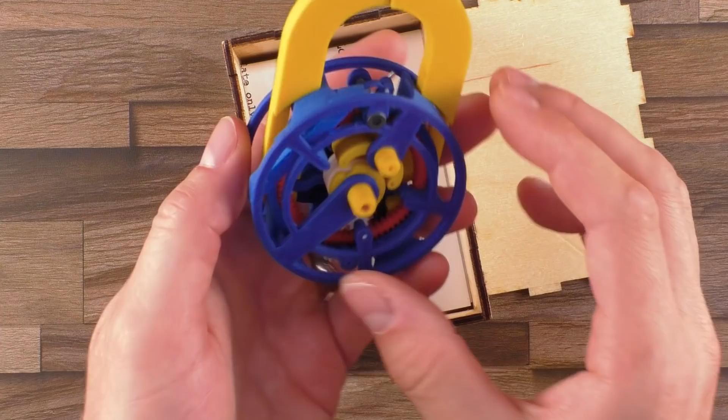And if you look inside, there is where the magic happens. This is the so-called Bovalis Lock number 1, designed and manufactured by Constantin Bovalis, mostly of 3D printed parts, and it comes also with an instruction here inside. It describes some rules to handle the puzzle, so it's important that we follow them, I guess.

And the rules are: you may directly manipulate the yellow, so that means the yellow parts probably. Then you may remove the clear, or maybe this one here. But the clear can directly manipulate only the red. Okay, so I'm not allowed to touch the red, but can touch it with the clear. But the clear is still in here. Now let's see. Your goal is to remove the coin. Okay. No force or extraordinary force to be applied to not damage anything.

Okay. As I mentioned, this is made all from 3D printed parts, as you can see. It looks like these gears here inside, let's say all the parts that are white, are made from SLS printing, while the bluish ones and the yellow ones seem to be made from FDM. The more resistant parts are the SLS for sure, it's probably nylon. And I think it's a good idea to make the gear parts from nylon, since they are loaded with some force and need to be more precise than the other parts.

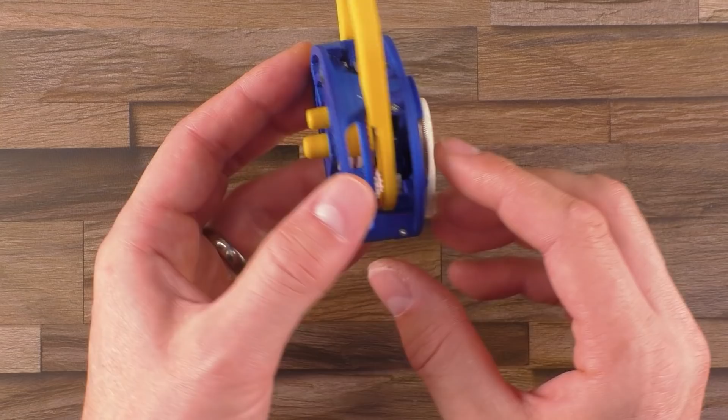What's also fascinating on this puzzle is that you can see everything here right from the beginning. So let's say the solution is hidden in plain sight. Actually, I do not expect this one will be too difficult, since we can see everything. Therefore, I will try to explain how I expect the thing will work.

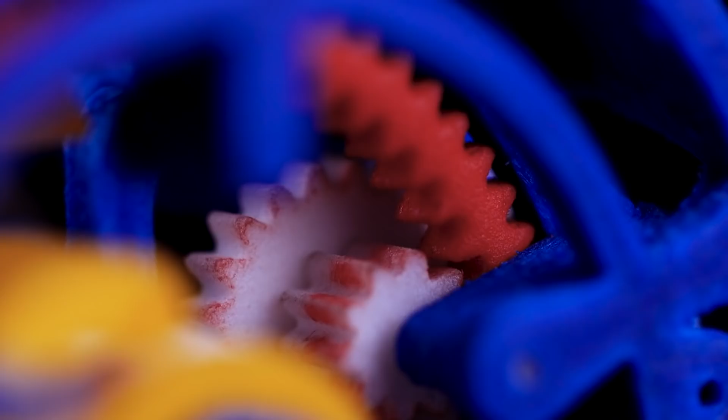Now let's have a closer look. We have these yellow pieces here, which we are allowed to touch, but are not really able to move right now. And we can see that this piece of the lock, which is obviously the one that opens, you can see it up here because of this shape. It seems to be locked inside here.

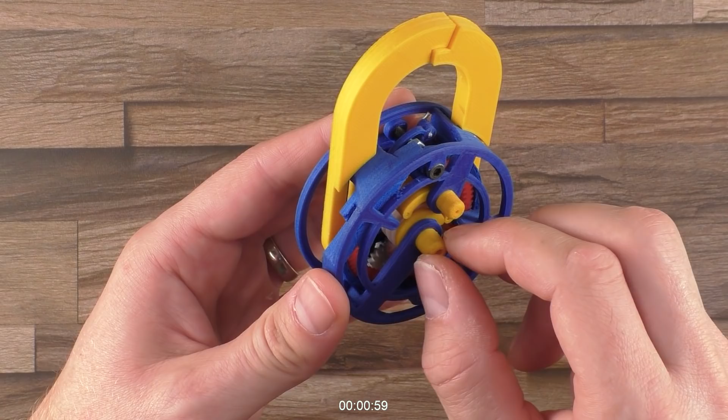You can see inside here. It's locked by this little lever over here. But the other lock is not blocked by this lever. It's blocked up here by the left half of the shackle. I think we could probably move these little levers down here by twisting here, but this is actually free to rotate. So let's understand it a little bit better.

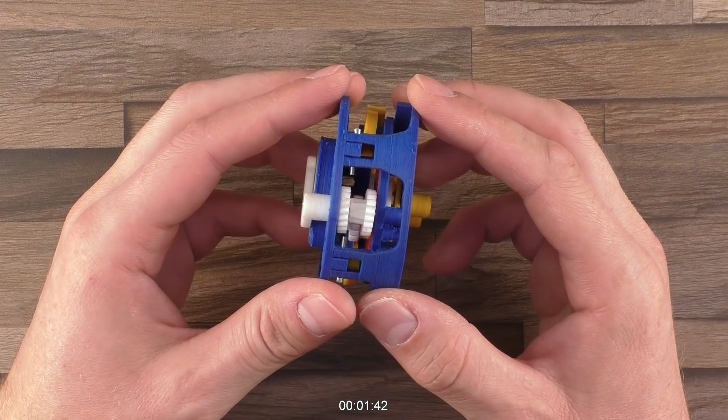Let's go from the rear to the front. We have the hook here. Oh, I'm not allowed to touch it. No. So the hook is connected here by this small axis, which goes from here all the way over here, it seems. So the hook will very likely twist in one or another direction. There is a gear inside here. Well, actually it's not only a gear, it's a complete transmission. Let's look a little bit more in detail how this transmission works.

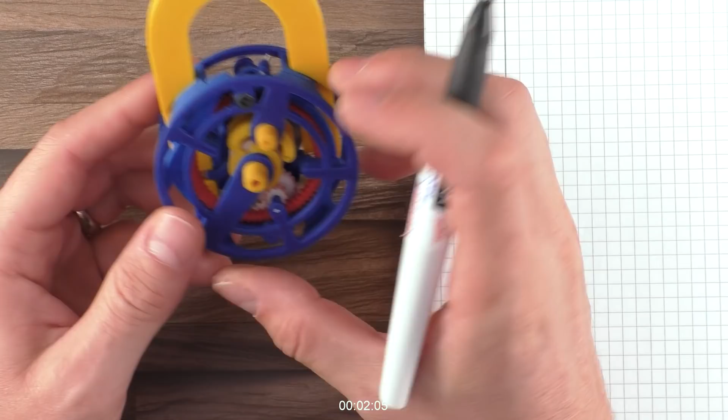Just a second. Let's see if I still can do this. It has already been a while since I had to calculate something that's related to a gear. And it's actually pretty easy, much easier than you expect if you never did it before. Okay, so let's look inside here. We have this hook that is connected here to this gear, the first one.

And this first gear, I'm not sure if you can see this, if you look inside here, you can see this small gear here, and this one is interacting with this gear here. Okay, so there is a small gear down here, and this gear down here is directly connected to another bigger gear. You can see it in here.

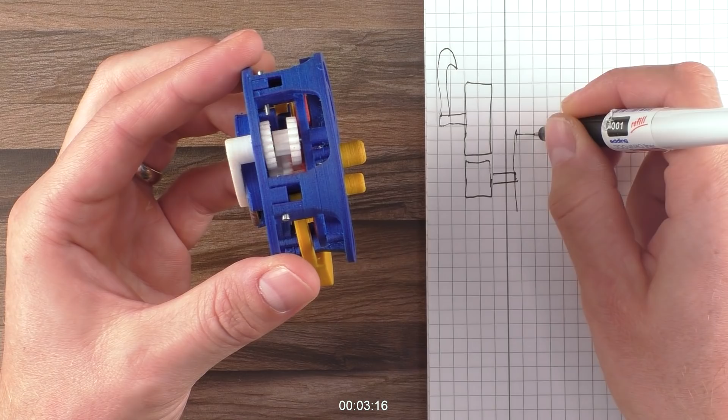This is the small one. There is another one, and these are actually one piece. So we can conclude there is a bigger gear over here. Okay, this gear is interacting with the small one here on the top again. And this small one is again one piece with this one. So they have the same speed, the same torque, and therefore we consider them to be connected like so.

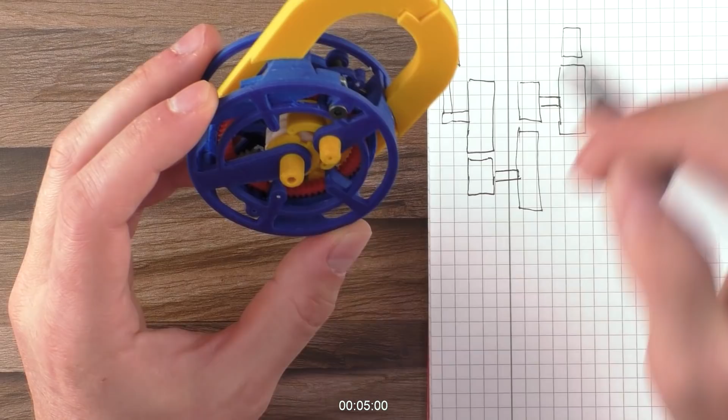So, and this gear, where is it going? It's connected here to the small one again. So that means there is a small gear up here. And you can see how complicated this is in such a small space already, yeah? And the small gear is connected here to this big red wheel.

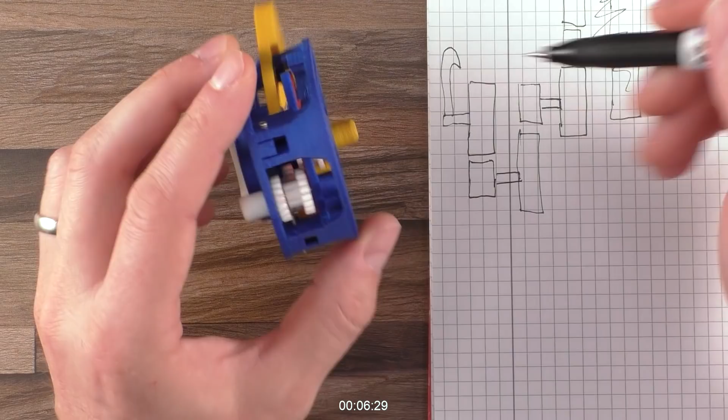So if the small wheel here rotates or the big one rotates, they will interact with each other and have the same speed. This one is actually not correct as I drew it. The big one must actually be here, okay? Because I just noticed this one is interacting with the small one, and the small one is directly interacting with the big one, so we can draw it like this, okay?

To calculate now the gear ratio of this overall gear, we can do it the following way, because we don't know the torque, we don't know the speed, but we know the number of teeth, because we can count them. So let me just count them. So let's assume we have for these kinds of gears 20 teeth, 20, 20, 20, another 20, and for the small ones we have 10. For the big red one, let's say 60. Okay. Not sure if the numbers are 100% correct, but it's just about the theory, so it doesn't matter.

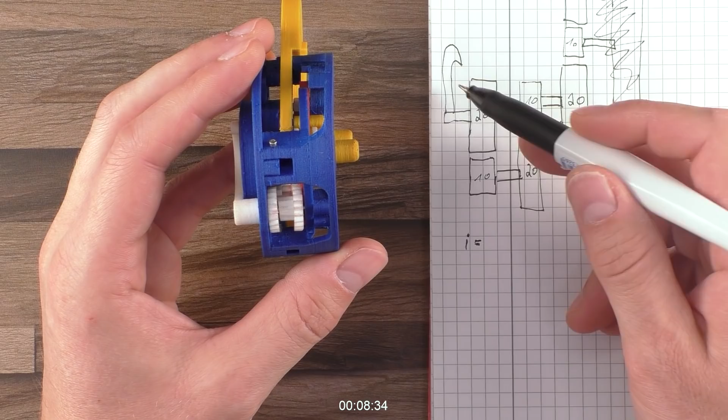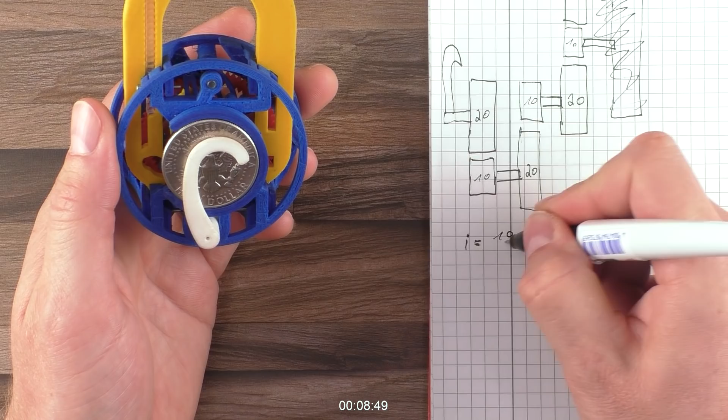To calculate the overall ratio of the gear, we can do the following. And this is pretty easy, actually. I hope I do this right now. It's a little bit complicated for me to explain in English, but I hope you will get the point. You take the gear that's not directly driven here. For example, if you start from here, we take the 10 and divide it by 20. Okay, this is the transmission ratio here of the first step.

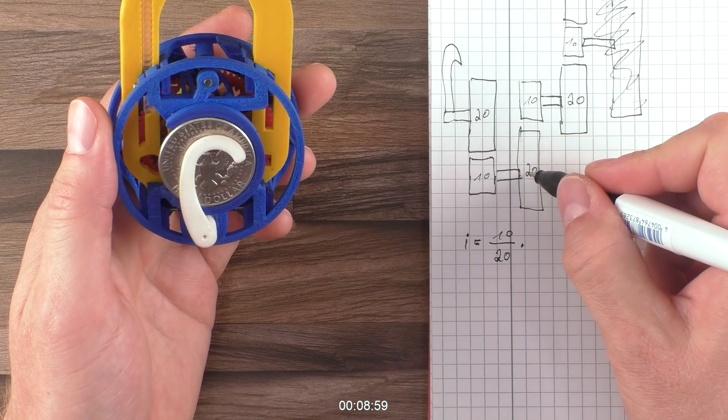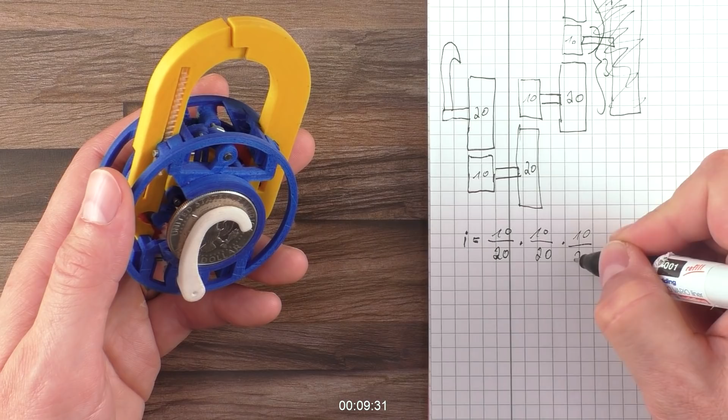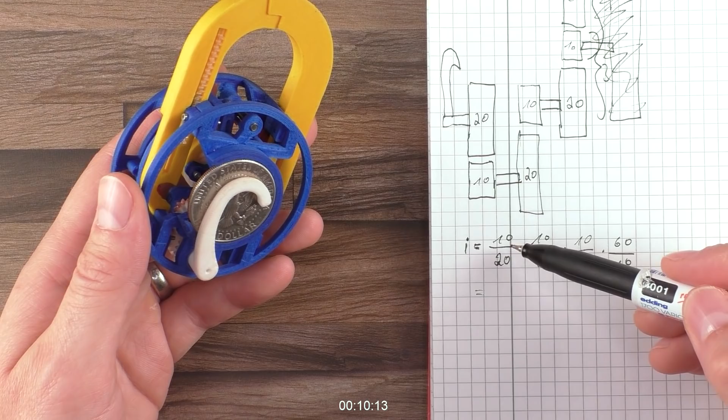Then we multiply it, and the second time we take the 10, this one, divided by 20. The third step is another 10 divided by 20. And the last one, 60, this one is the other way around, divided by 10. And this one here in the end will actually oppose all we did up front, if I did it correctly, because here we had a transmission that increased our speed, then another speed increase, another speed increase, and then we reduce the speed again.

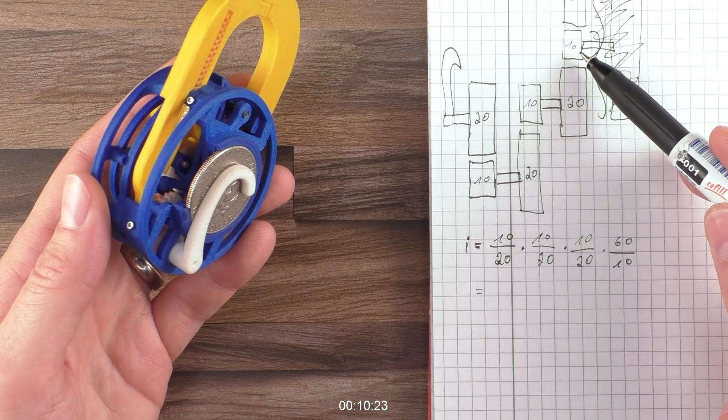And if we look at the teeth, we can assume here that our overall gear has a ratio of 6 divided by 8, and this makes it a ratio of 0.75. I hope I did this correctly.

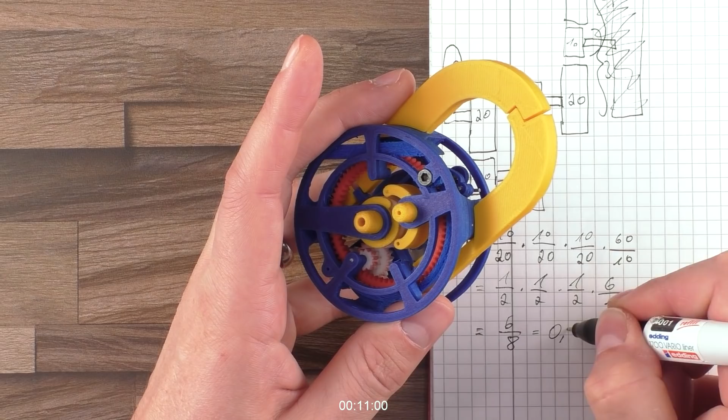In the end, yeah, we have not really increased or decreased our speed and torque. We are nearly at the same level as before, and it seems this transmission was only necessary to transfer our torque from one place to another.

Then there is this mystery here about these discs. I can already guess what they will do, because I saw before, if I look inside here from this side, you can see that there are small pins on each disc. So you can see if I twist them, there's one here on the yellow one, on the first one, and on the second one. They are all equipped with pins.

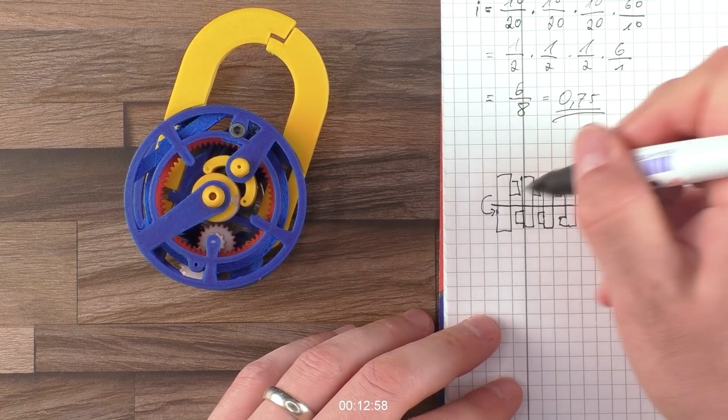I think this should work the following way. If I now start to rotate this one here, first it will drag only one disc and then another disc and then another disc until all of them are rotating, and this is pretty much how this works here. So one revolution, one disc, second disc, third white disc. Okay, all are rotating. Not sure what this is made for, but we can also see that there are little cutouts here on the top.

These cutouts are probably to fit this lever here. So let's just align them. Let's see what happens. I just twist it until the last disc starts to twist. I will put it in position and then I twist it back. You can see how I can now adjust the third one. It would work like so. Then the second one.

Like so. And now the first one. Now, I did the wrong side. This shackle is locked here by the other part of the shackle, so I need to do it the other way around. So let me just get the notches of the disc onto the other side.

Okay, now you have seen I unlocked it here. Very small movement, but it's connected through a lever and through a coulisse up here. So I make a very small move here. It's this one, but the move here of this lever is bigger, and now I can pull this one out.

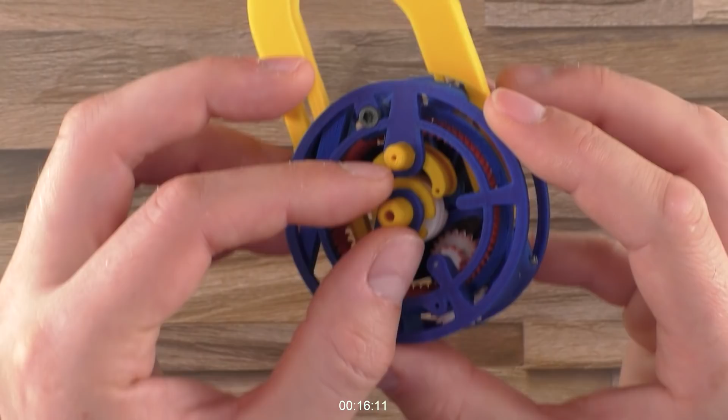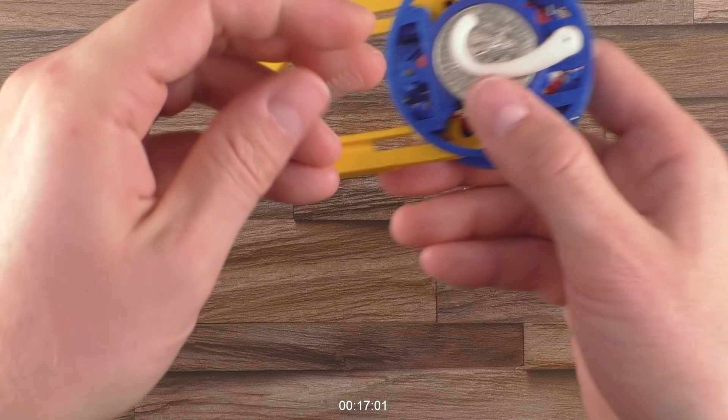And what to do now? So again, this hook is driven through this transmission. Transmission is going to the red, and the red is not connected to anything.

I mean, I could do it like this, yeah. But this is, I think, not how it should be used. This would be so rude. If you imagine how much thinking went into designing this, and I take this thing here and go from the side and scratch it in position. This cannot be the correct solution.

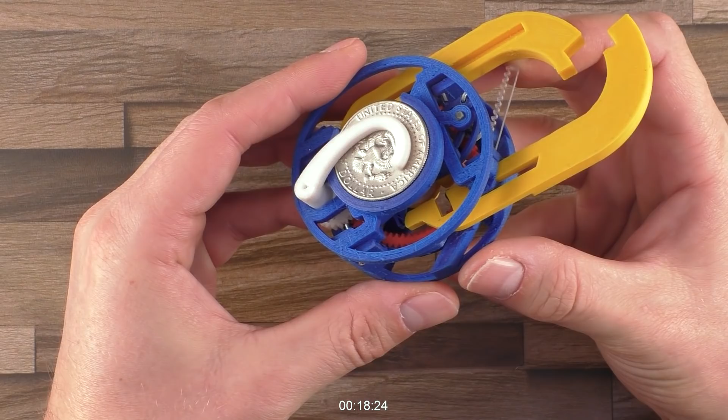I can access it maybe from here. Oh yeah, I saw it. Okay. There's a little channel up here. Get it in. And if I press it now in from here, yes, it will drive the hook out of position. Look at this. 1, 2, 3.

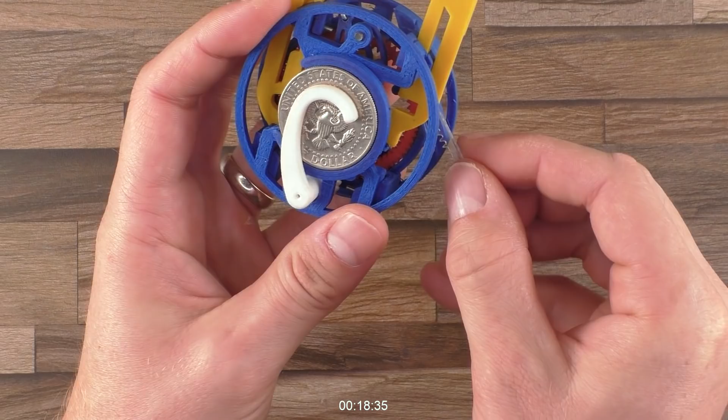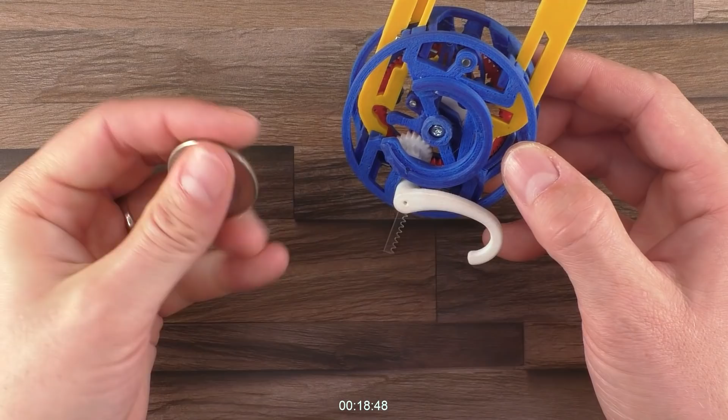Oh. Stuck. Let me try it from here. Let's move it in the other direction. Yes, here we go. You see? And that's it. Pull it all the way through. And the coin is free. 50 cents comes with the puzzle, so it makes it 50 cents cheaper.

Pretty cool. Very, very unusual and cool puzzle. For sure not the most difficult one. I think if you really focus on it, you will open it in a few minutes. But still, it's something very special. So if you like collecting puzzles, this is definitely something for you. It's different than everything you have in your collection. The difficulty rating I would rate with a 2 out of a maximum of 5 on my personal difficulty rating scale. And as an engineer, I can only recommend this, of course.

Now I need to get it back in place. So I will push it back down here. I will pull it through. Yeah, exactly in place again. And what's also fascinating is you need to consider, of course, the design in the design phase. If you design this and push it through, you need to drive this hook exactly the correct amount to free the coin. And this is actually what this transmission does here.

So it's not really a transmission to lower the torque or anything, as I said, or change the speed. It's only to ensure that the ratio between this red ring here and this little hook here in the rear is correct. There's a lot of fine-tuning in this, a lot of thinking, and I really appreciate it. I will get the discs back, and this is also a pretty cool mechanism here. Very cool idea. And here we go, back into the initial position. Puzzle solved. So even if it was not the most difficult one, this was so much fun.